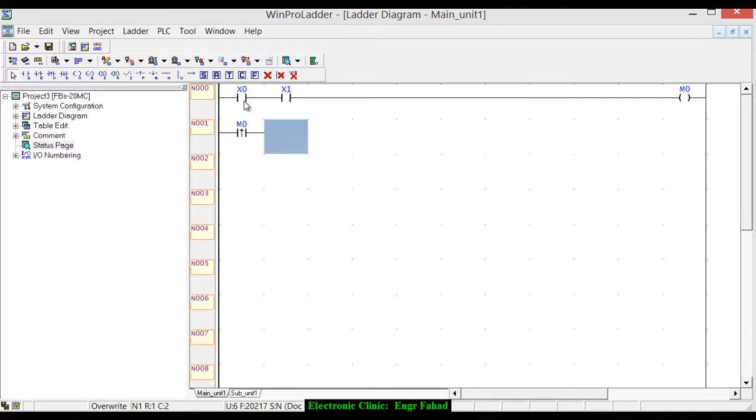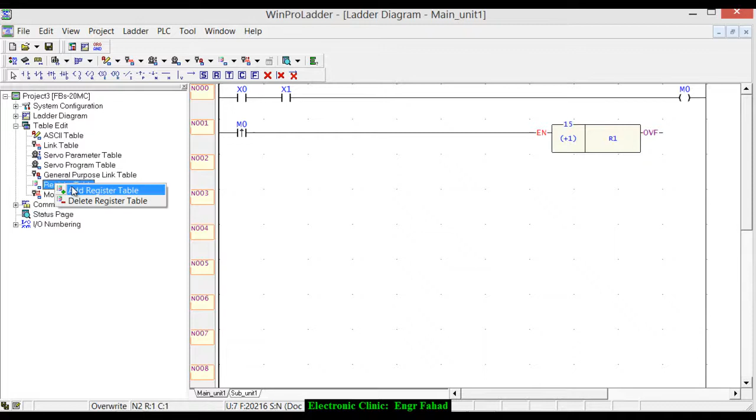Now this time use a differential up contact, so click U and write M0, and then click F, write INC, increment, and write R1. So the number of the larger boxes will be saved in R1. First let's make a table: register table, add table, and let's name it production. Starting address from R0, fixed length, let's say 20, and these are 0. Now open this one, and R0, let's save 1.

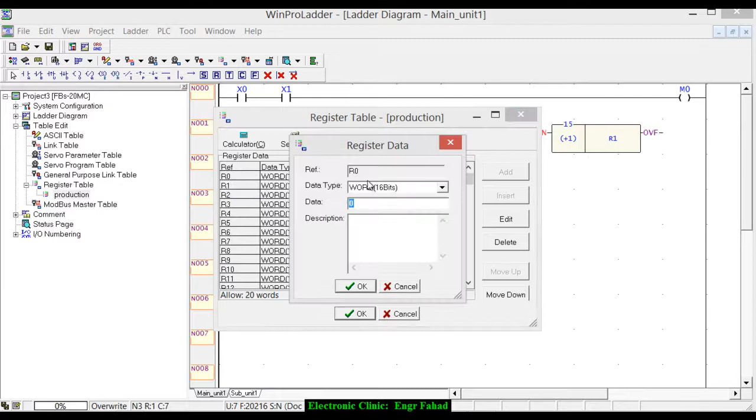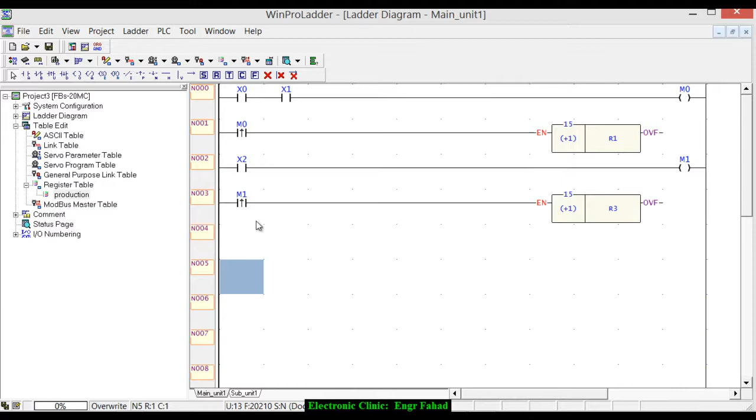Now as another sensor is connected with X2, write X2, output M1. Again click U on the keyboard for the differential up contact and write M1, and again click F, INC, and write R3. So the total production will be saved in R3 and the larger boxes will be saved in R1. Now let's first check this one and see what else we have to do then.

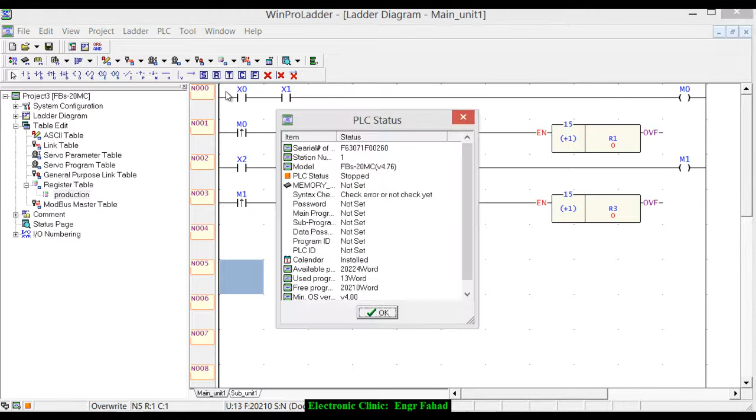So click online. The PLC is already connected on COM5. Click OK. Yes. Yes. Yes. Okay. PLC and run. Yes.

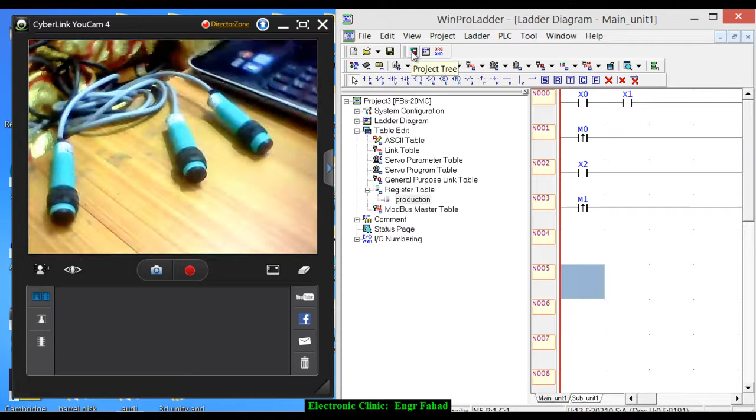So now these are the sensors I'll be using, as you can see on the screen. Let me maximize. This one is X2, this is X0 and this is X1. So let me maximize this so that you can see. So now let me put this battery and see what happens.

As you can see, at this time X0 is activated, as this is in front of the X0, and I'm sliding this, and now X1 is activated. So no matter how I do, you can see that at the same time only one sensor is activated, and R1 is still 0 because this is the AND instruction, and M0 will go high only if the battery covers both the sensors.

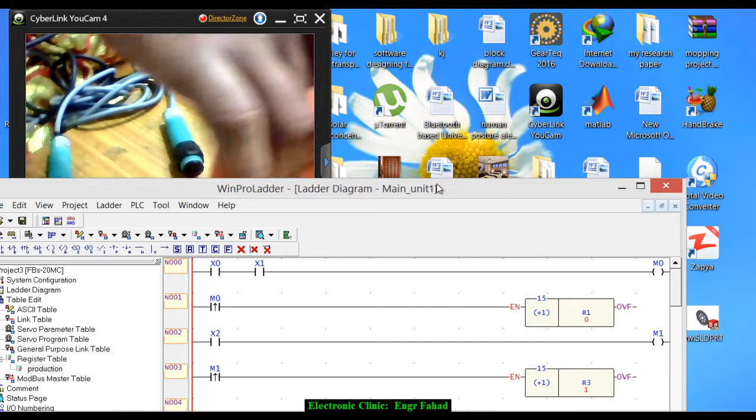So as you can see, it will just pass by and it will increment only R3. So in the total production there is 2, because the first time I put my finger in front of the sensor, that's why it was incremented at that time. So again let me start, and as you can see it's doing nothing, and this time the smaller products are 3 and so on. As you can see, there is no error and it's just working.

So let me now check this larger box. Now let me start from here. At this time X0 is activated, and now as I move this, you can see that both the sensors are high, and R1 is incremented, and meanwhile R3 is also incremented. So let's start again. The larger boxes and then this one.

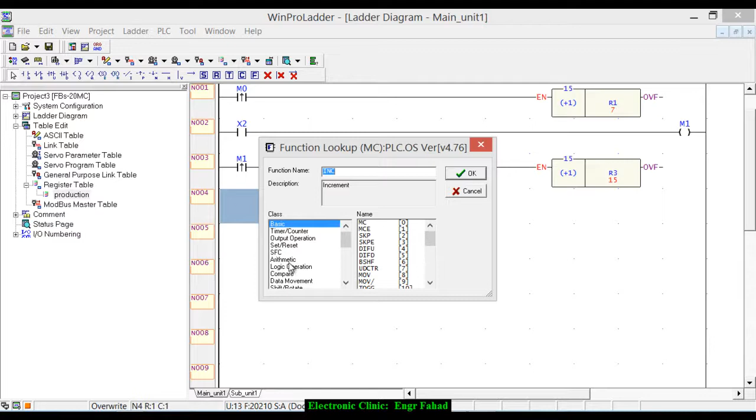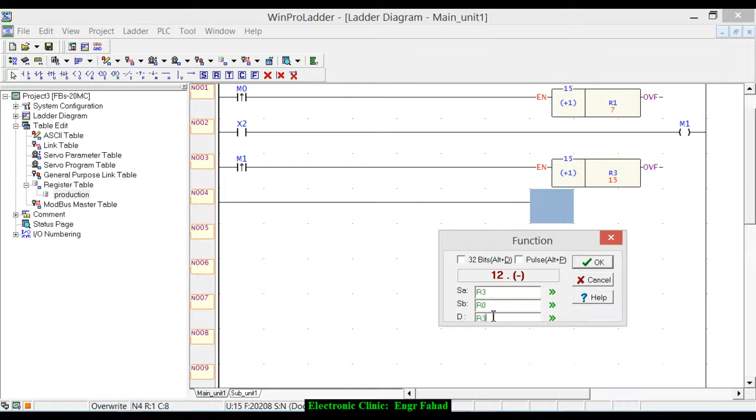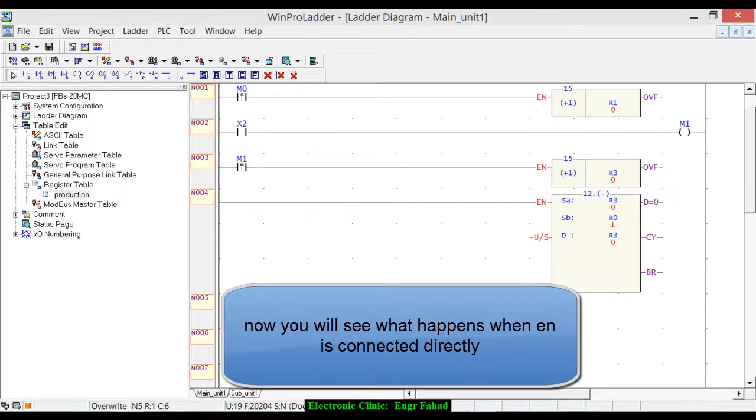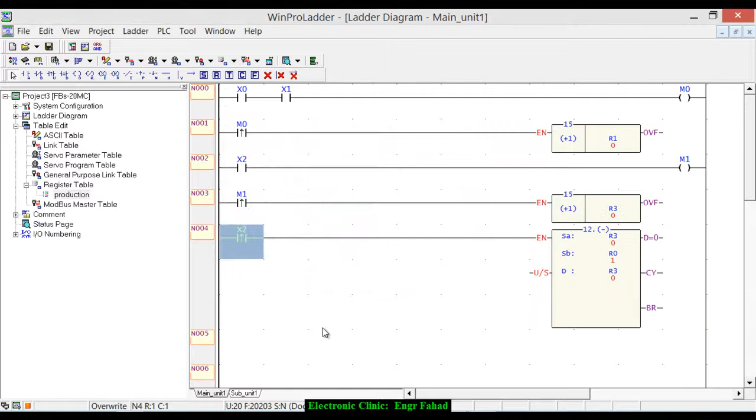Let's make all the registers 0. Not this one, this one, and let's start. Okay, now let's check. Run PLC. Yes. And write X2. Use differential up. Let's make this 0. Yes. Okay, now let's check one more time.

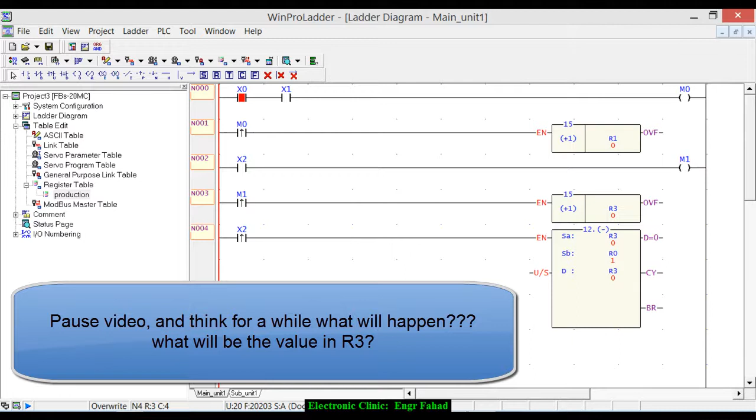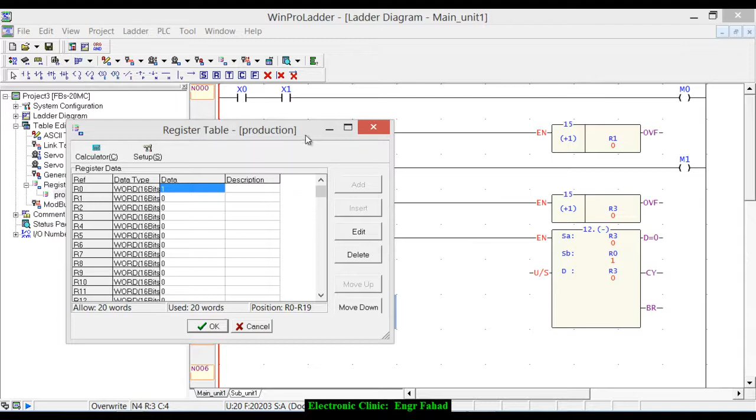So now, can you understand what's happening? The R3 will always have a value of 0 because we are subtracting. As you can see, in R0 we have 1, and when we used the instruction R3 minus R0, R3 minus R0 will be equal to 0. Save.

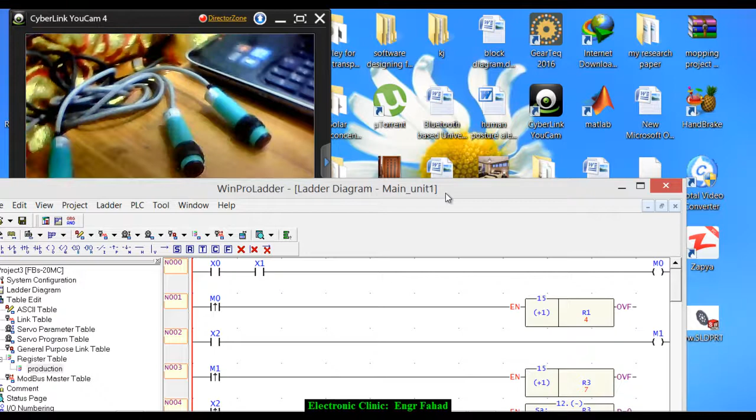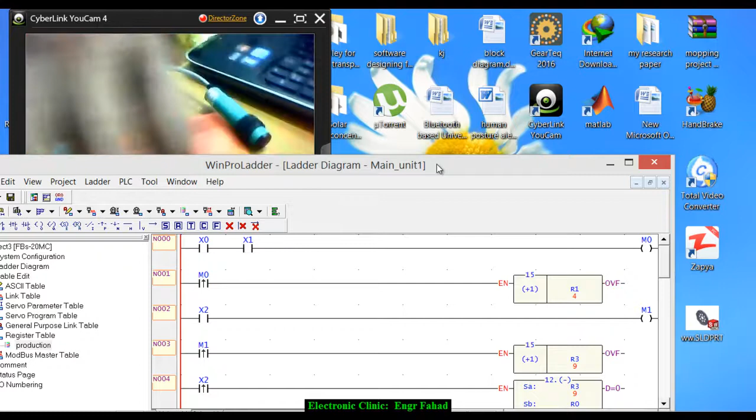So we have 1, the total production is 1. So this is the total production. This is 1, 3, 4, 5, 6, and again there is a small box. And so now you can see nine, 10, and now the larger box.

So out of 12, this is the total production, and this is the number of the larger boxes. So if we subtract R3 minus R1, it will give us the smaller boxes. Click U for differential up, write X2, again click F, select this one, minus. So what is source A? The total production is in R3, so that is R3, and source B is R1, and the destination is R4.

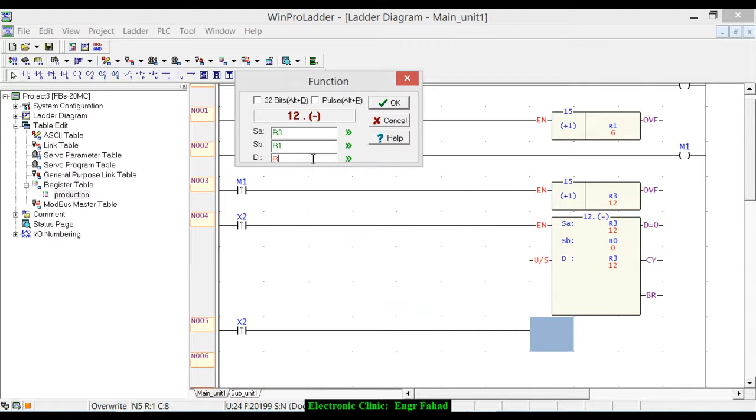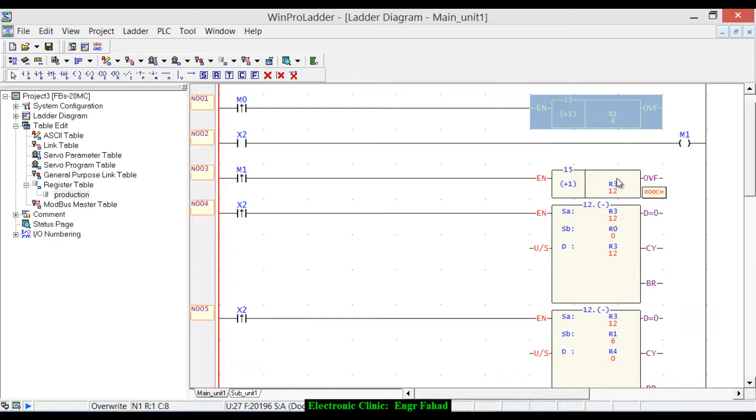Okay, now run PLC. Yes. So the larger boxes we have are 6, and the total production is 12. It's running. So okay, now this time I am putting the battery in front of the sensors, and you can see that R3 is incremented, and this time the larger one. So you can see R1 is incremented. Now again battery.

So as you can see, the total production is 18 and the larger boxes are 7. These are the larger boxes. Larger boxes are 7, the total production is 18, and so the remaining are the smaller boxes. So now again here is the smaller battery, 20.

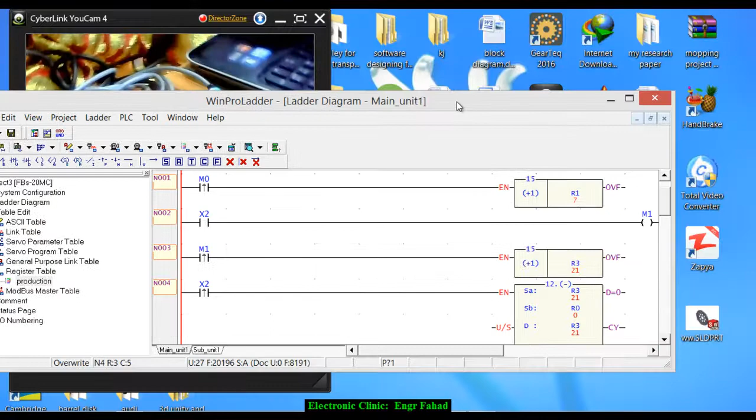And now for the larger one, you can see R1 is 7 and now it's 8 and like that. So this is how to count the larger boxes and smaller boxes. So the total production is now 23. Out of it, the larger boxes are 8 and the remaining are the smaller boxes.